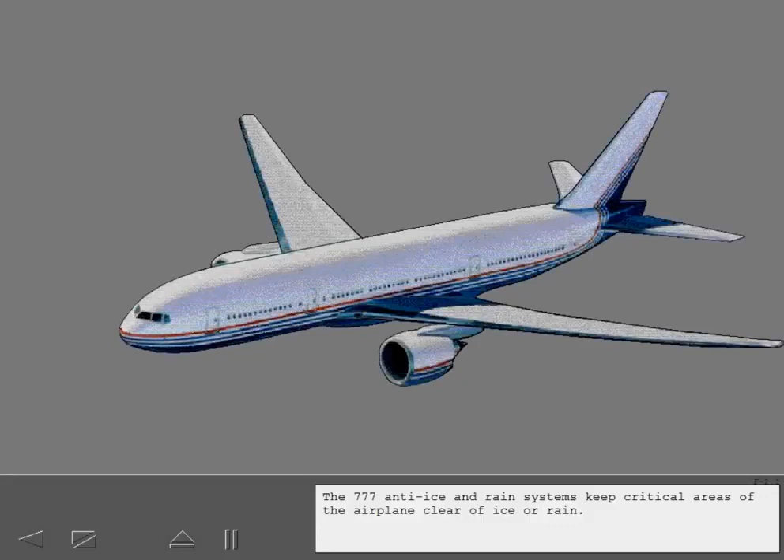The 777 anti-ice and rain systems keep critical areas of the airplane clear of ice or rain. Engine cowls are heated by engine bleed air. Three mid-wing slats are heated by bleed air from the left and right bleed air ducts. Flight deck windows and all probes are heated electrically. There are no flight deck controls and indicators for probe heat.

Now let's examine each individual system, starting with primary ice detection.

The primary ice detection system is fully automatic. It includes 2 fuselage side-mounted probes. If ice buildup is sensed by either probe, both probes are heated until fully de-iced. This is called an icing cycle.

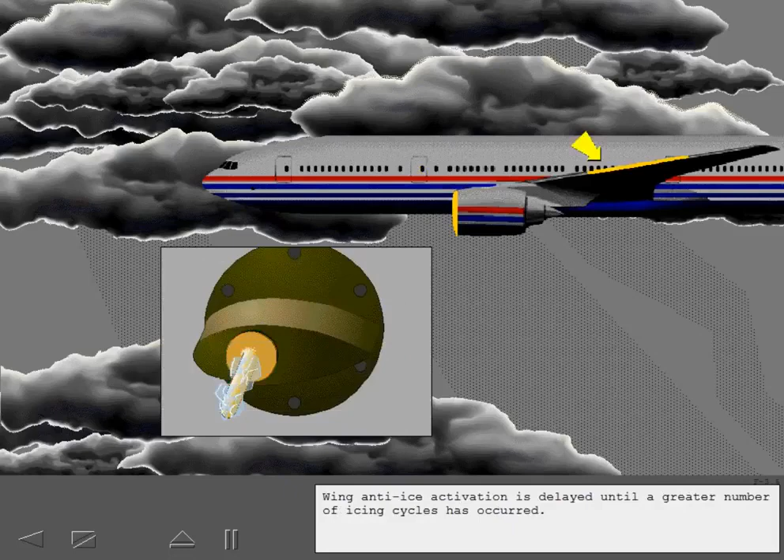During automatic operation, engine anti-ice activates soon after icing is detected. Wing anti-ice activation is delayed until a greater number of icing cycles has occurred. If icing is not detected for several minutes, both systems are automatically deactivated. The ice detection system is also reset for the next icing encounter.

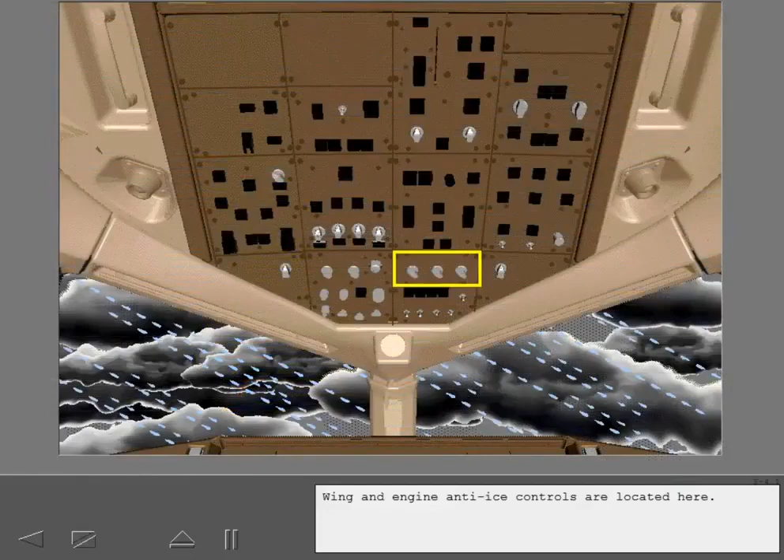Now let's look at anti-ice operation in more detail. Wing and engine anti-ice controls are located here. To help us review the engine anti-ice controls, first, display the air synoptic.

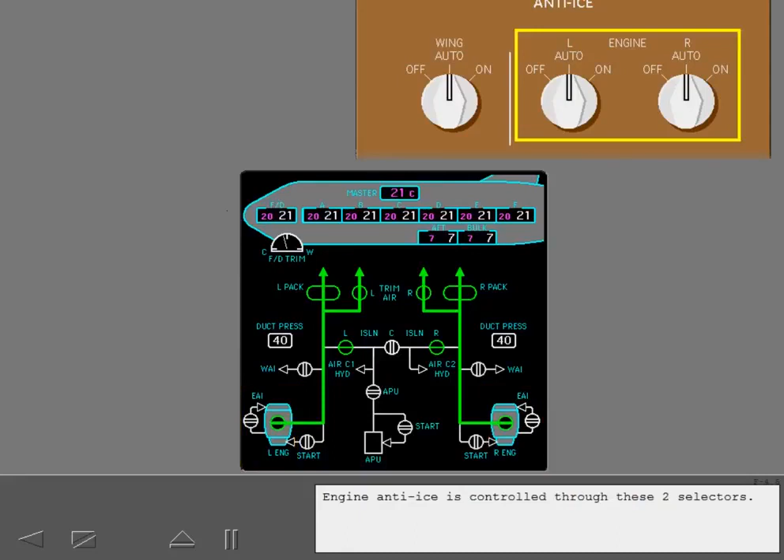Engine anti-ice indications are displayed here. Engine anti-ice is controlled through these 2 selectors. The off position commands the anti-ice valves closed. The on position commands the valves open, allowing manual operation of the system, both on the ground and in flight.

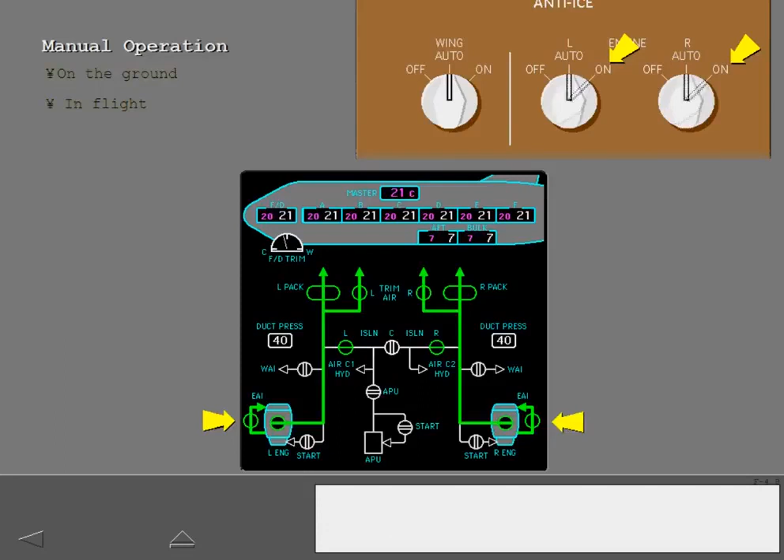For example, during taxi in icing conditions. The auto position enables automatic operation of the valves in flight. Auto is the normal pre-flight setting.

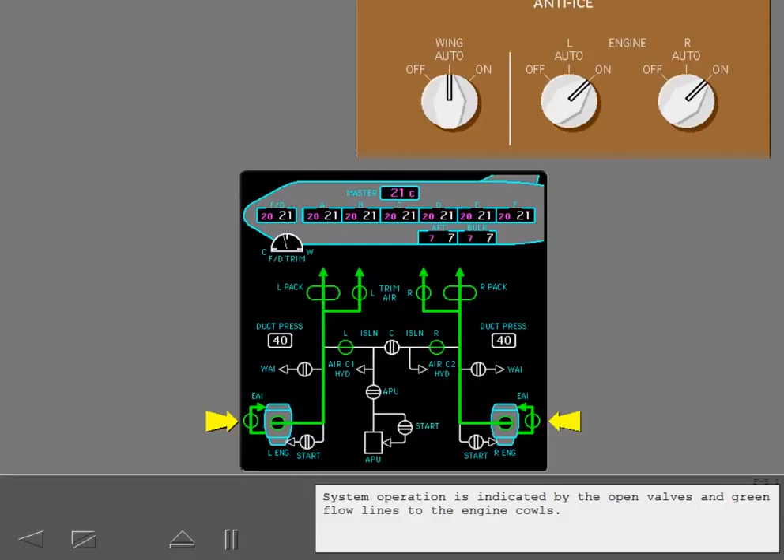Position the selectors to on and note the indications. System operation is indicated by the open valves and green flow lines to the engine cowls. Because each engine system is self-contained, no other anti-icing air source is available should an engine fail.

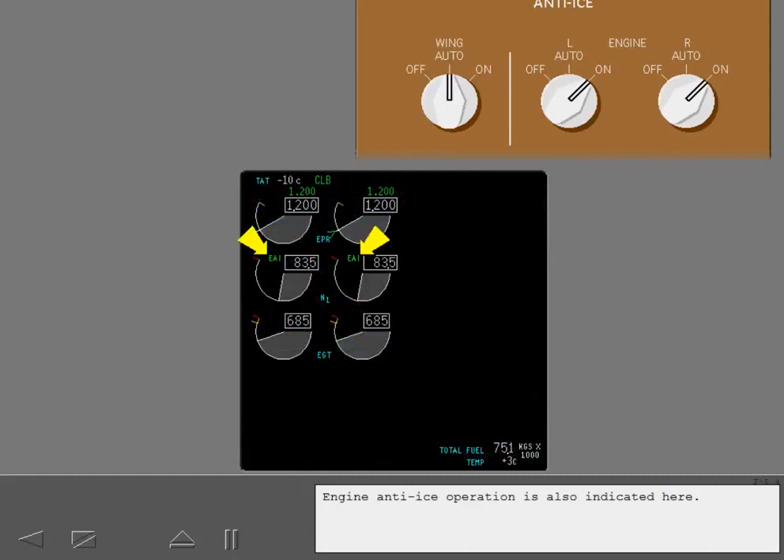Engine anti-ice operation is also indicated here. The respective EAI symbol is displayed whenever the associated engine anti-ice valve is open. Continuous ignition is automatically controlled by the EEC auto relight system.

Before we move on to wing anti-ice operation, reposition the engine selectors to auto.

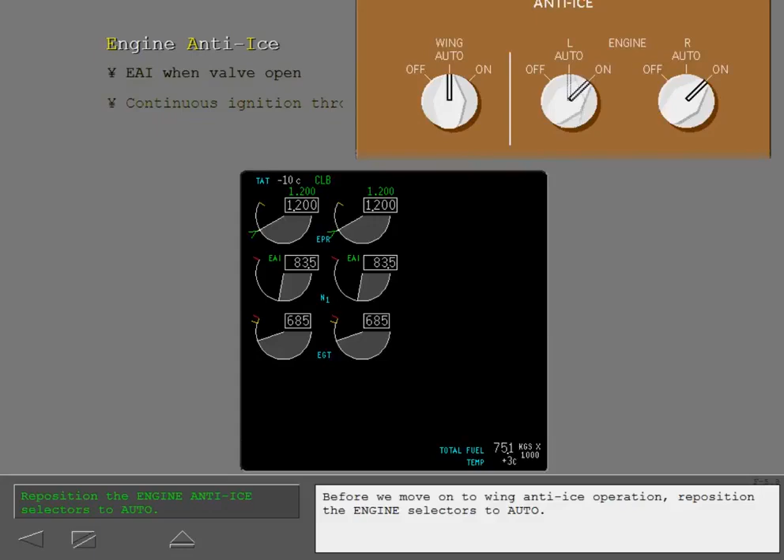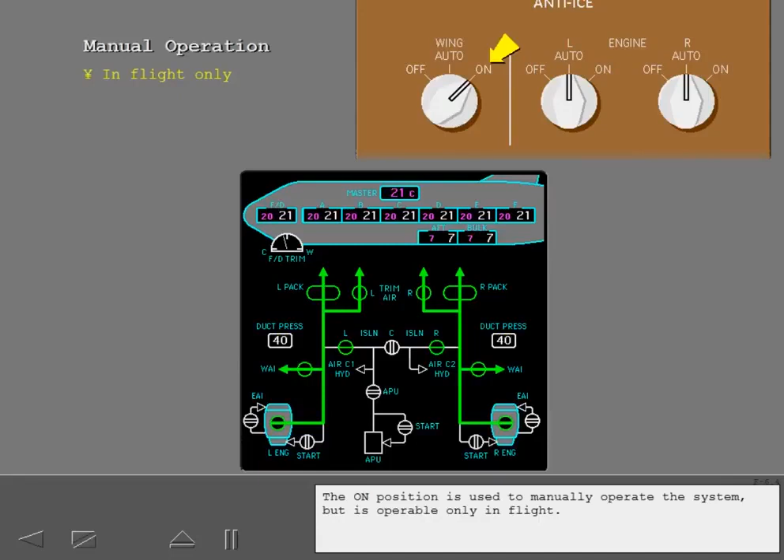Wing anti-ice is controlled by a single selector. Wing anti-ice indications are displayed here. The off position commands both wing anti-ice valves closed. The on position is used to manually operate the system, but is operable only in flight.

The auto position enables automatic operation in flight and is the normal pre-flight setting. System logic inhibits all wing anti-ice operation on the ground. Also, all operation is inhibited for 5 minutes after takeoff if total air temperature is 10 degrees or above.

In addition, automatic operation is inhibited after takeoff for up to 10 minutes in takeoff thrust or until transition to climb thrust.

When the valves are commanded open, flow lines are displayed. Also notice that both wing ducts can be supplied from a single air source through both bleed air ducts and the isolation valves.

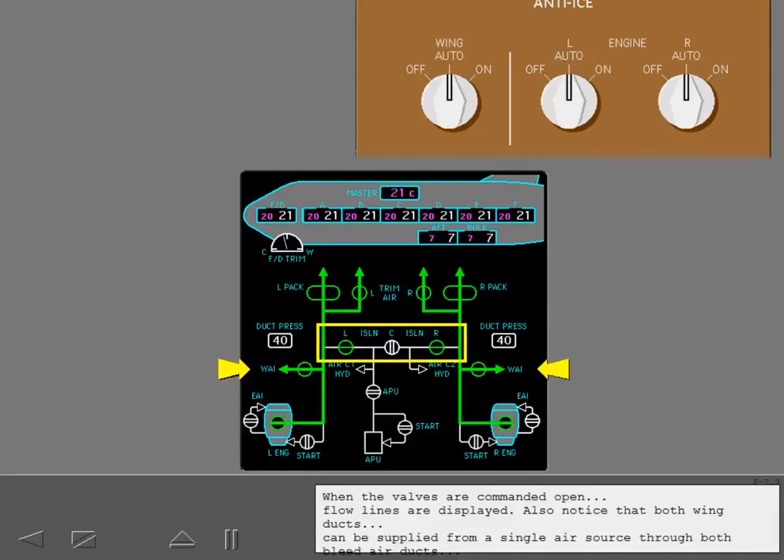Indications for wing anti-ice are located here. When activated in flight, the WAI symbols are displayed as each valve opens.

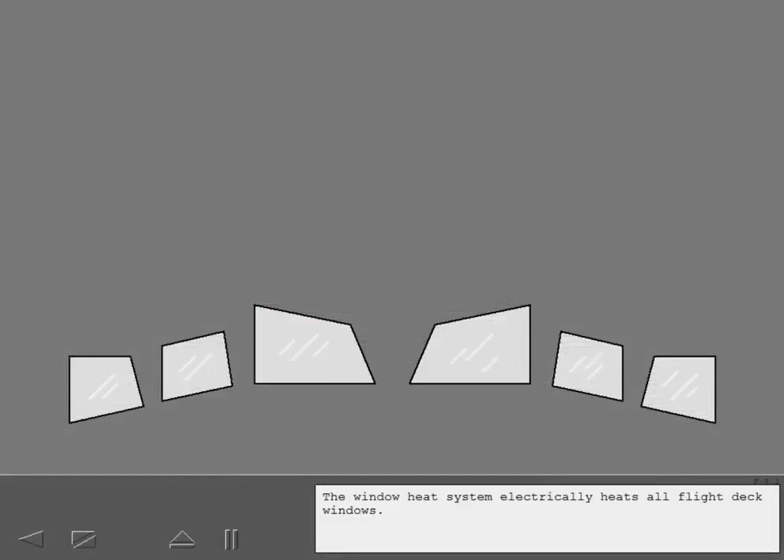Next, let's discuss window heat. The window heat system electrically heats all flight deck windows. When the system is first activated, a reduced power warm-up cycle is used to reduce window thermal shock.

All windows are heated for anti-fog protection. In addition, the forward windows are heated for anti-ice protection. The forward windows are also provided with a backup power source for anti-fogging. The window heat controls are located here.

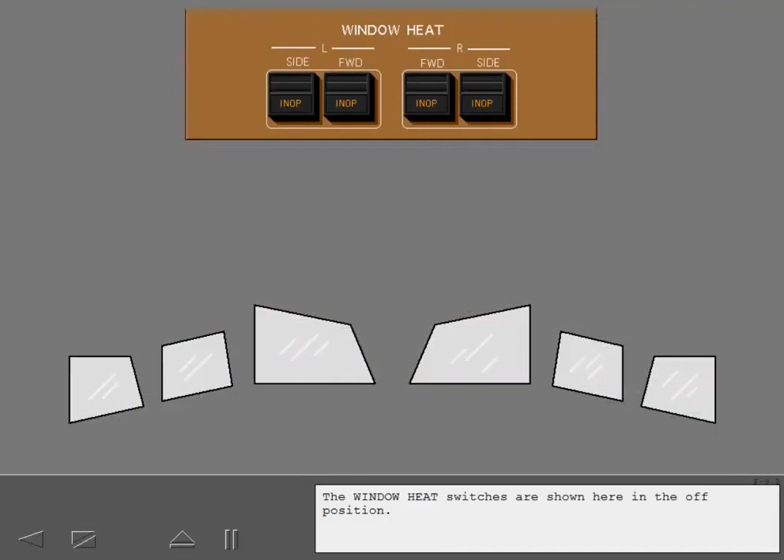The window heat switches are shown here in the off position. The inoperative light illuminates whenever a switch is off. During normal operations, however, the switches are always on.

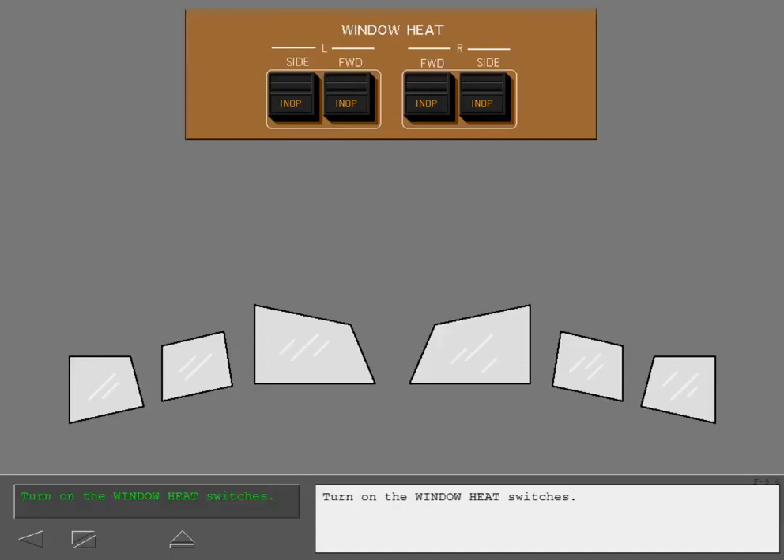Turn on the window heat switches. Notice that the inop lights are extinguished. During pre-flight, the switches are checked on with all lights extinguished.

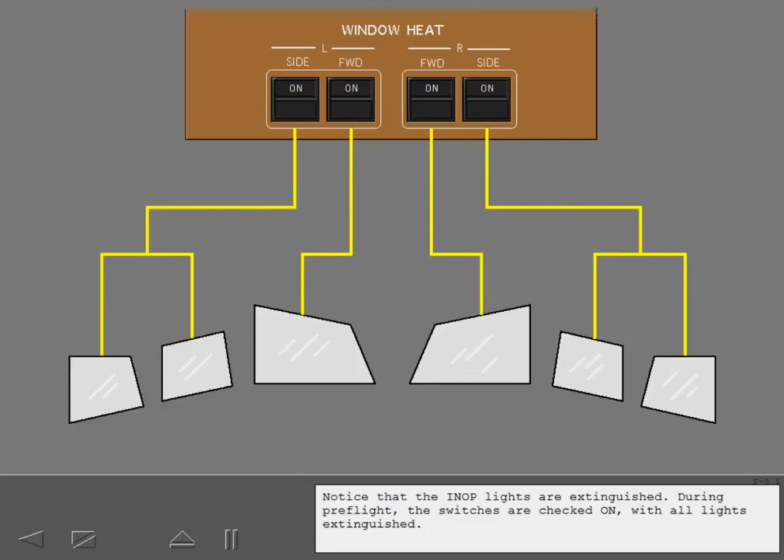Before discussing non-normals, let's look at windshield rain removal. A liquid rain repellent system is not installed on the 777. Instead, the pilot's windshields are treated with a hydrophobic coating.

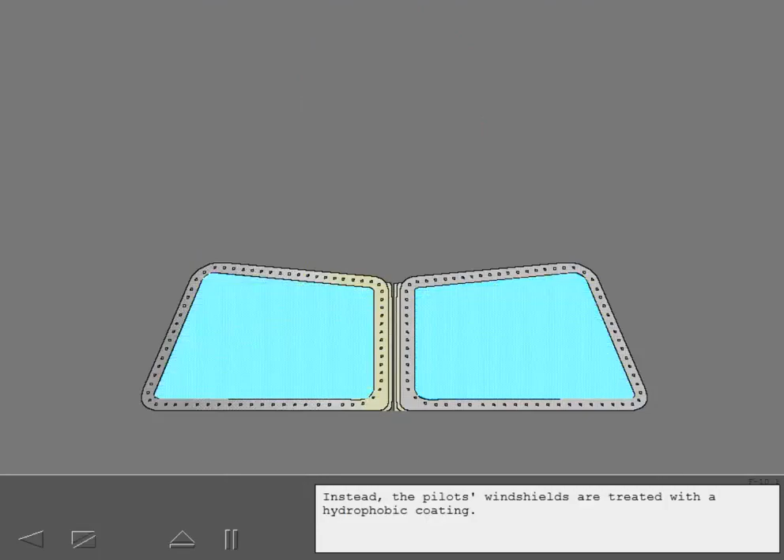The coating inhibits surface wetting and causes water droplets to roll off with minimal wind. As speed increases, so does the effectiveness of the coating. The windshield wiper controls are located here.

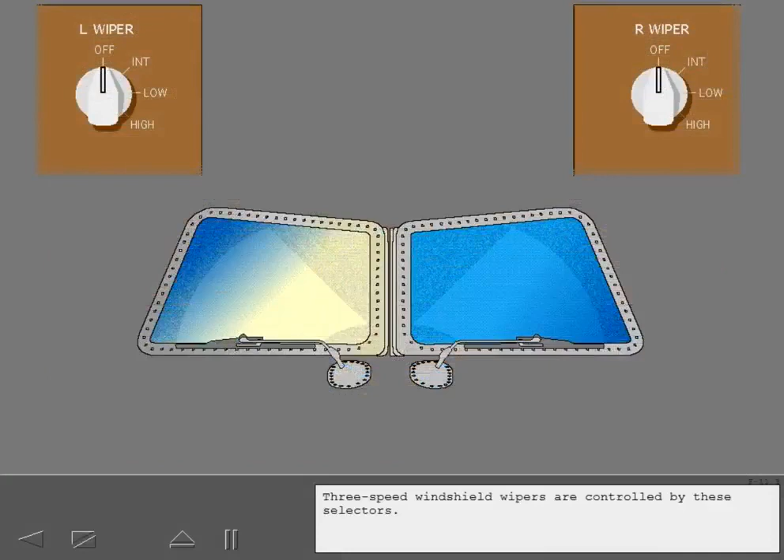3-speed windshield wipers are controlled by these selectors. Off stops the wipers. The intermittent position operates the wipers with a short delay between wipes. Low operates the wipers continuously at low speed, while high selects high speed.

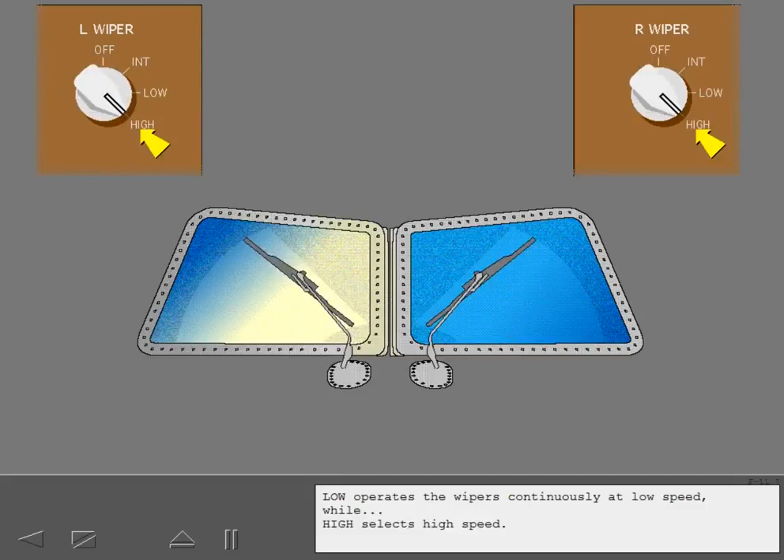To avoid scratching the hydrophobic coating, do not operate the wipers on dry windshields. Before electrical power-up, make sure both selectors are in the off position.

This concludes normal system operations. Now let's look at some non-normal conditions.

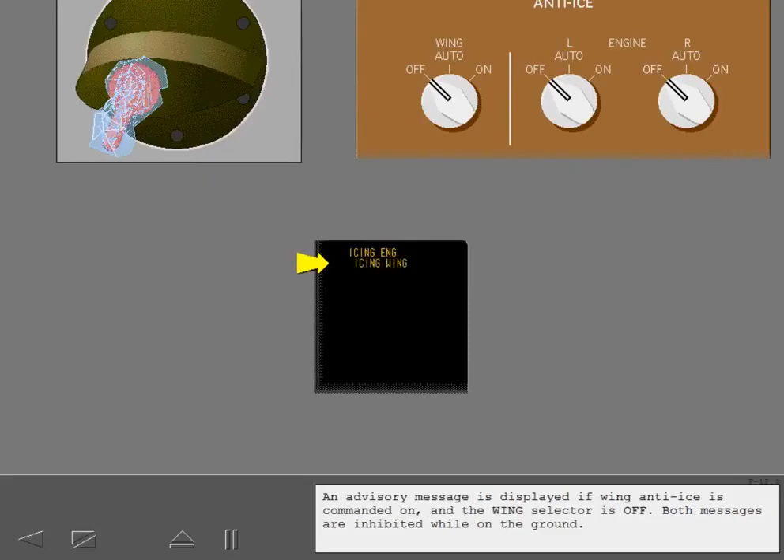A caution message is displayed whenever the ice detection system commands engine anti-ice on and one or both engine anti-ice selectors are off. An advisory message is displayed if wing anti-ice is commanded on and the wing selector is off. Both messages are inhibited while on the ground. Remove the messages by setting the anti-ice selectors to auto.

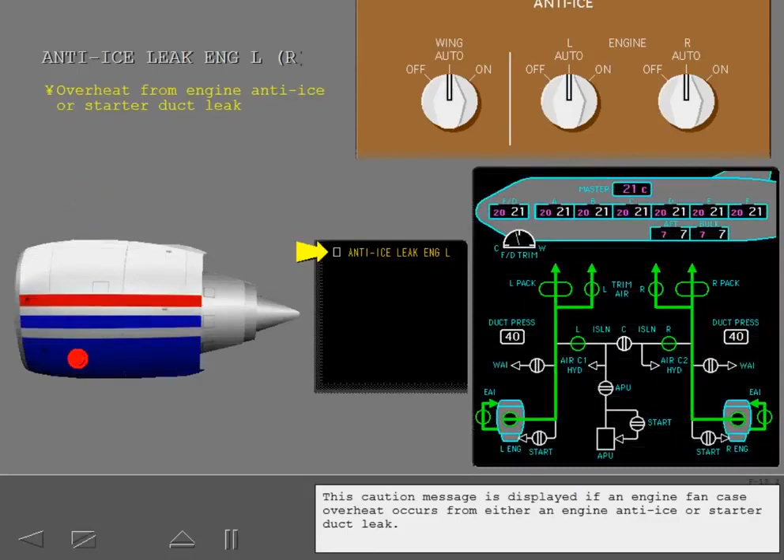This caution message is displayed if an engine fan case overheat occurs from either an engine anti-ice or starter duct leak. The anti-ice valve is automatically commanded closed. If the fan case cools normally, the leak message is removed,

and the anti-ice loss engine advisory message appears. Engine anti-ice is no longer available.

However, if the leak message remains after time is allowed for cooling, engine thrust must be reduced to avoid structural damage. Reduce power until the message is removed or idle is reached.

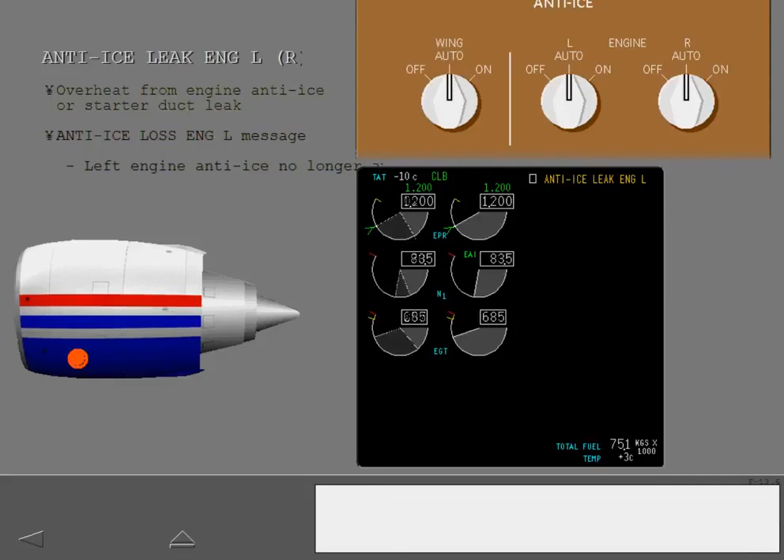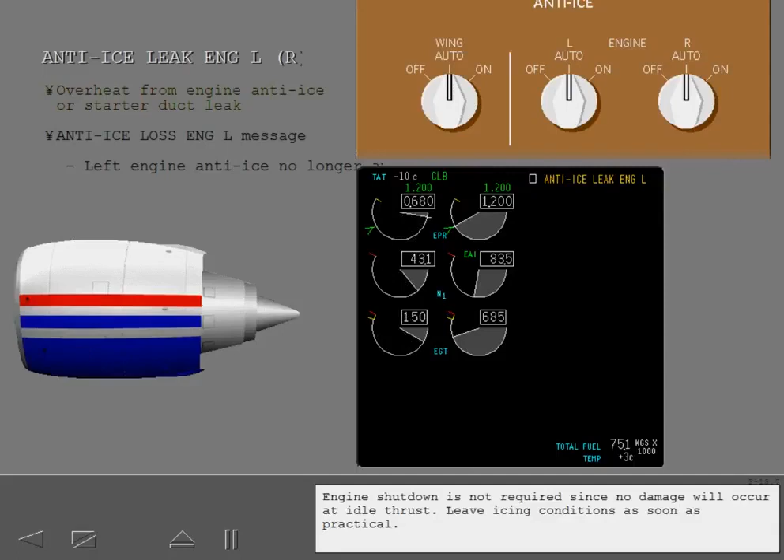Engine shutdown is not required since no damage will occur at idle thrust. Leave icing conditions as soon as practical. Cancel the remaining message.

This advisory message is displayed when the anti-ice valve is commanded open but remains closed due to valve or controller failure. Position the left selector to off, then to on, and let's see what happens.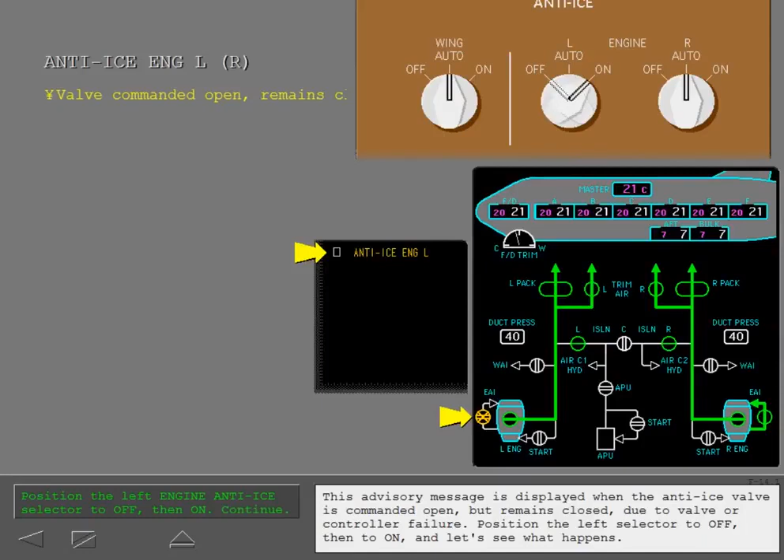Because the valve opened, the failure is in the automatic controller. Use the on position and operate anti-ice manually for the affected engine.

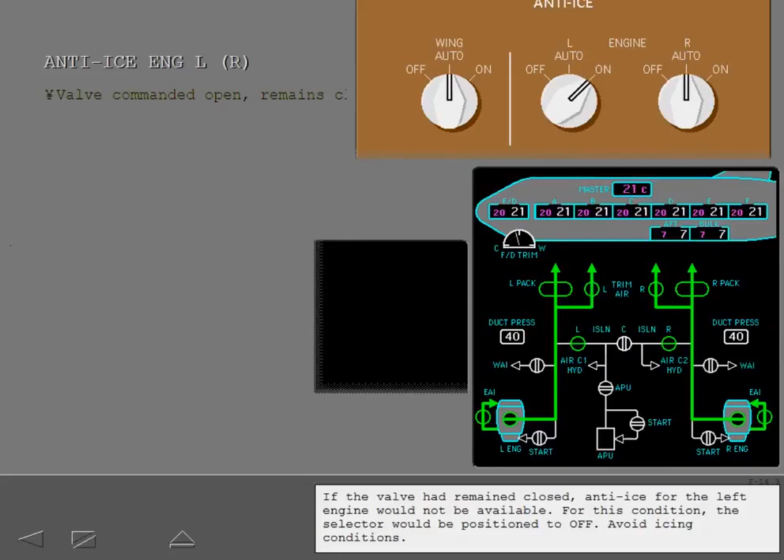If the valve had remained closed, anti-ice for the left engine would not be available. For this condition, the selector would be positioned to off. Avoid icing conditions.

The anti-ice wing message is displayed with the same set of conditions just discussed, but applies to wing anti-ice valve operation. Both valves close to prevent asymmetrical anti-icing.

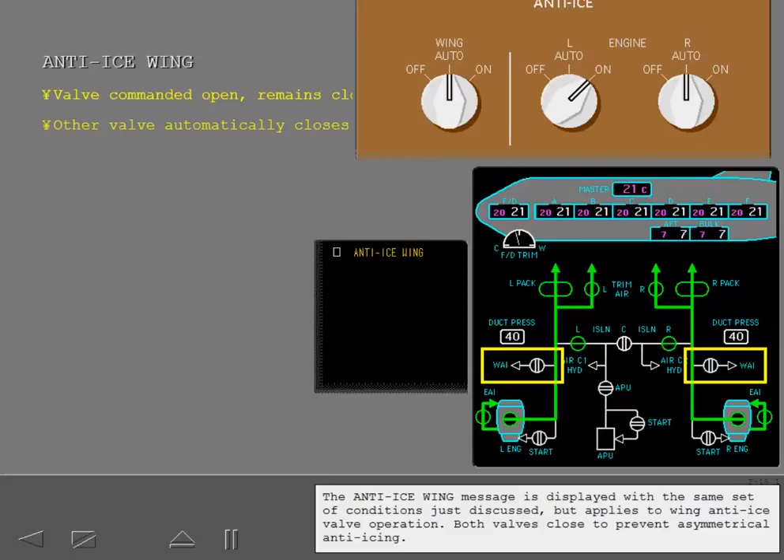Position the wing anti-ice selector to off, then to on. In this case, a valve has failed closed.

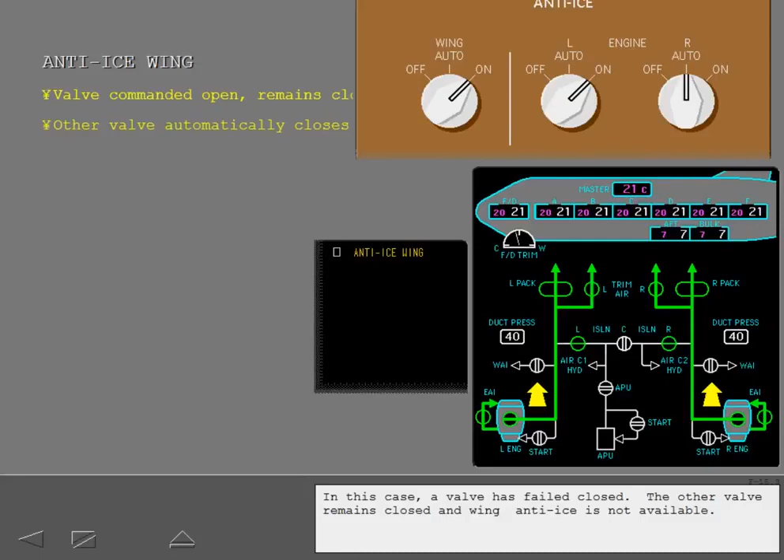The other valve remains closed and wing anti-ice is not available. Position the wing anti-ice selector to off. Cancel the EICAS messages.

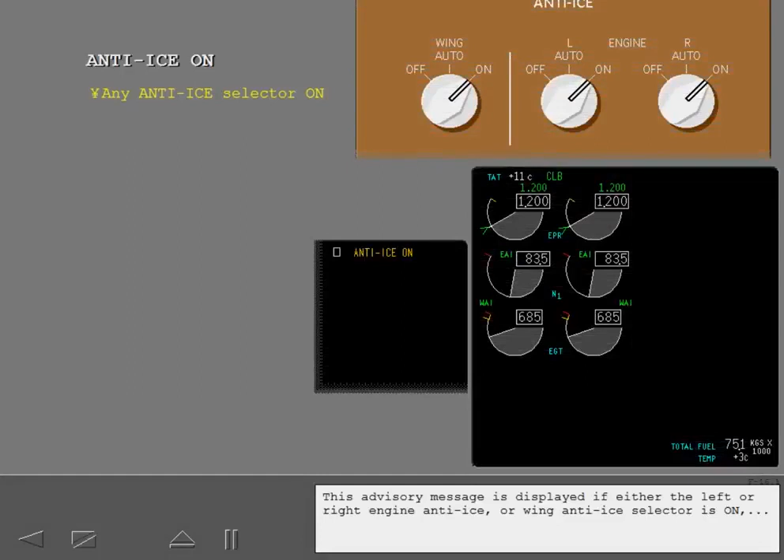This advisory message is displayed if either the left or right engine anti-ice or wing anti-ice selector is on, but icing is not detected and total air temperature is above 10 degrees. Position the selectors to auto to remove the message.

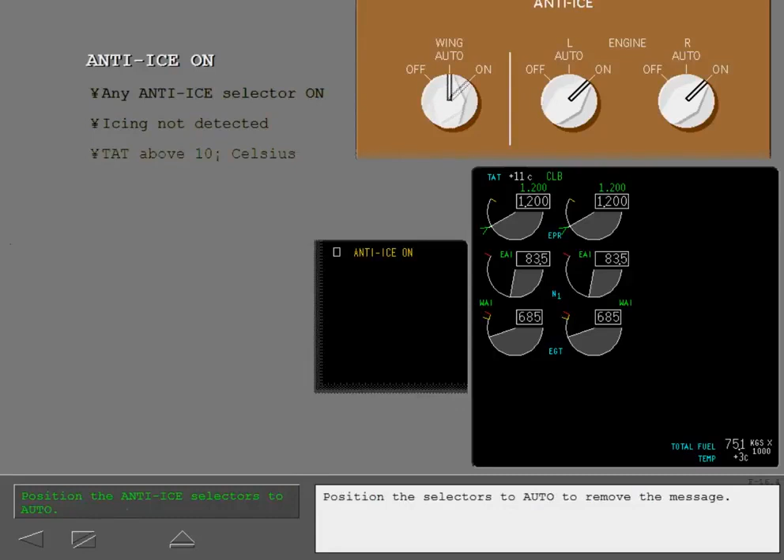An advisory message is displayed when automatic ice detection operation and alerting have failed. All anti-ice systems must be operated manually if icing conditions are encountered. Cancel the message to proceed.

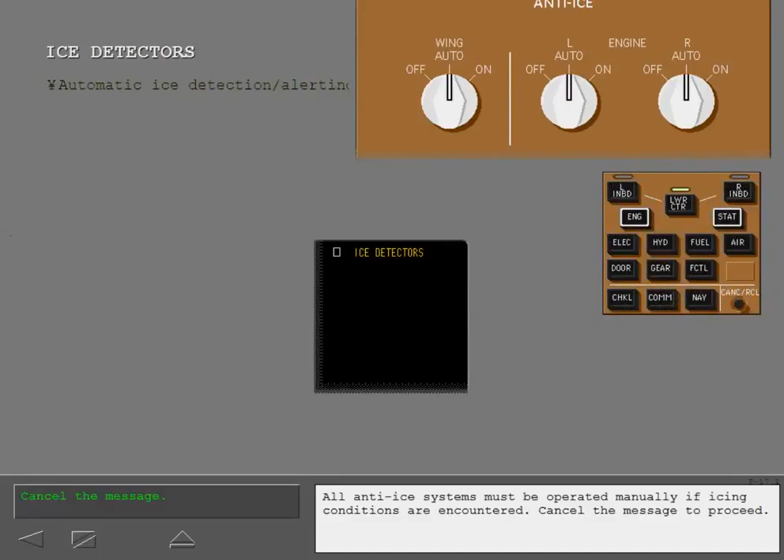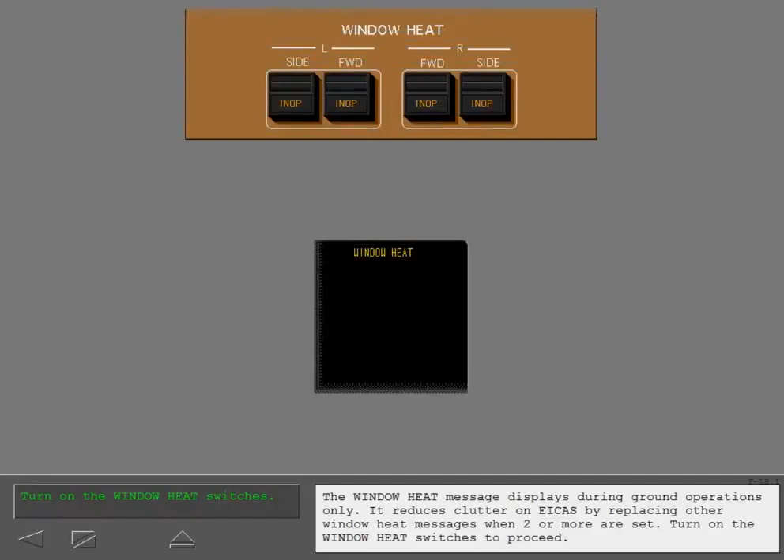The window heat message displays during ground operations only. It reduces clutter on EICAS by replacing other window heat messages when 2 or more are set. Turn on the window heat switches to proceed.

This message is displayed if window heat to the forward right window is inoperative due to an overheat or system fault. Messages for the other windows are similar. To reset the fault, push the switch off, then on.

If a forward window fault will not reset, backup heat is automatically provided for anti-fogging.

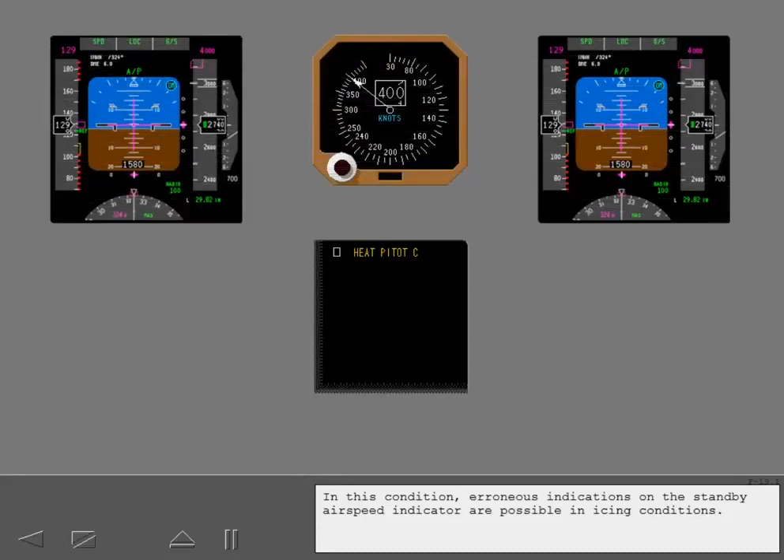If center pitot probe heat fails, this message is displayed. In this condition, erroneous indications on the standby airspeed indicator are possible in icing conditions.

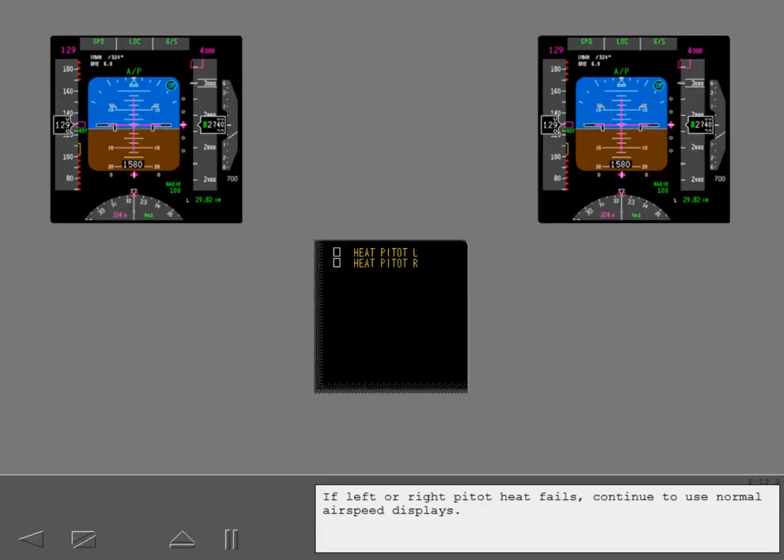If left or right pitot heat fails, continue to use normal airspeed displays. The air data/attitude switches should remain off. The associated alternate display is unreliable in icing conditions.

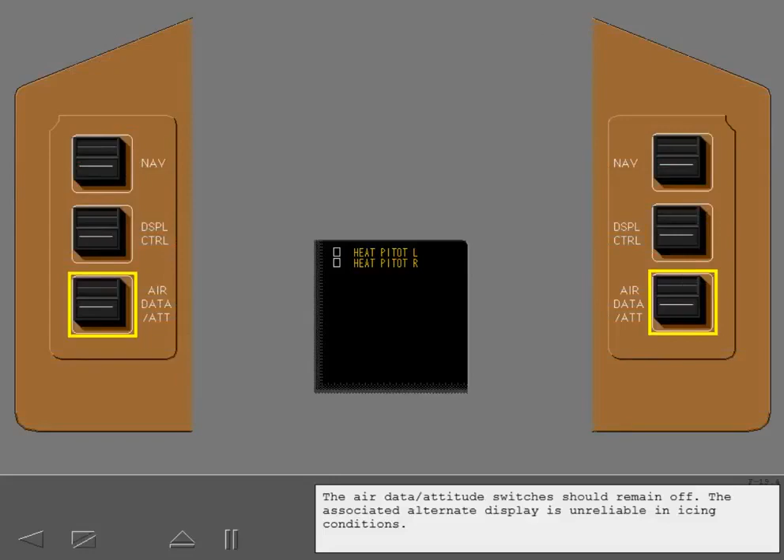This message indicates all pitot heat has failed. All air data may be erroneous if icing is encountered. Cancel the message.

This completes the instruction portion of the anti-ice and rain protection lesson.